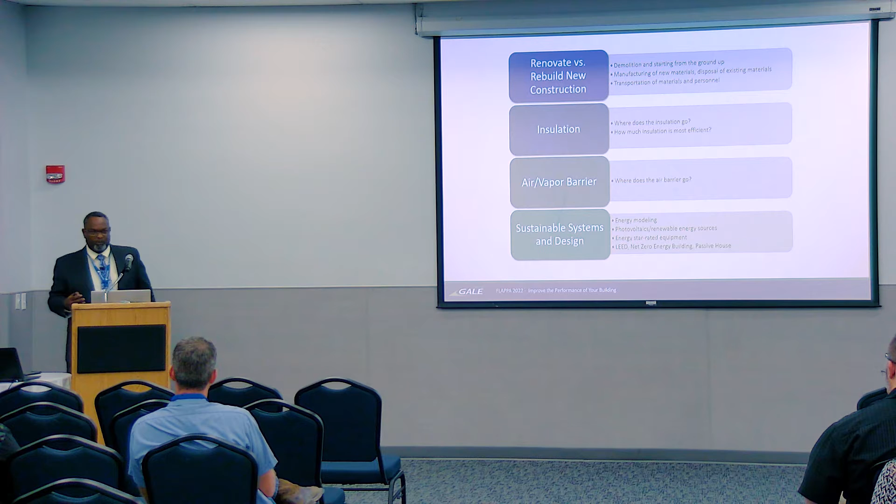So you have to ask yourself, are you going to renovate or rebuild with new construction? Whichever the case, you need the mindset of reducing energy consumption whether renovating or building new. A lot of times that wasn't considered - we just wanted to build the most beautiful building, but it wasn't performing the way it needed to perform.

One of those things everybody knows about is insulation. Insulation in your walls, roofing system, and different areas helps improve the thermal performance of your building. It reduces the need to have the AC as cold or the heat as hot as it needs to be.

Air vapor barrier is probably one of the largest things on the building envelope that can reduce your energy consumption. I did a presentation on air and vapor barrier with a slide showing 1 square inch of air coming through your wall can produce 6 quarts of moisture. That's quite a bit. So you want to keep that air vapor out of your building envelope - keep it sealed, monolithic and whole with no breaches.

Looking at sustainable systems, you can look at your building - there are firms that do energy modeling. They'll take your building, do an energy model on it, see how it's performing with the HVAC over a period of time, and show you where your most expensive times are, and the least expensive times, though you probably already know that from your power bills.

One other thing I'd like to point out is to talk to your maintenance staff - that's what they're here for. They know everything about the buildings they're maintaining. A lot of people don't really connect with them. When I go out and look at a site, I want to talk to the maintenance staff to see if occupants have been complaining it's too cold or too hot at certain times, or if they've smelled any unusual smells, the M word, mold, or something like that. People smell those things, so you tap into that knowledge as well.

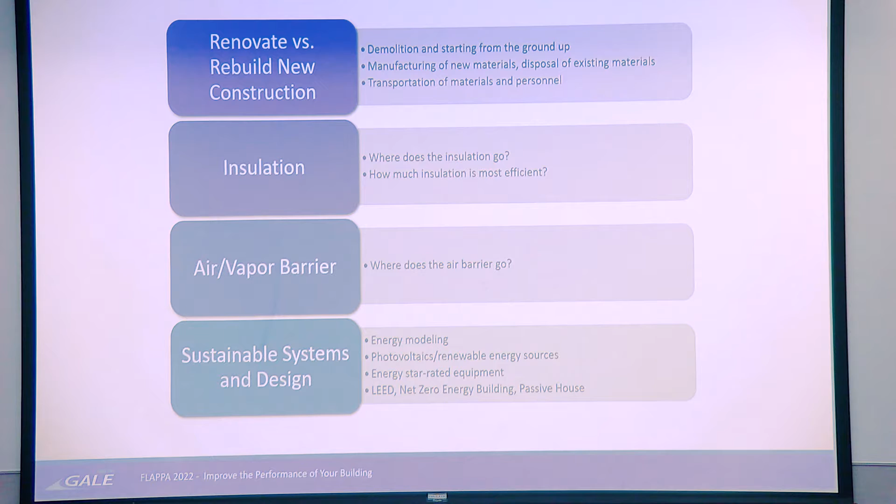They just put something in my mailbox saying we can now have your house on renewable energy only, just come and sign up. I thought, oh man, that's pretty cool. I looked at it, but the price was just as much as if I was on fossil fuels. They haven't made it economical for us yet, but it's going to be there - you're going to get that flip-flop. That's why you see all the electric cars out now.

I was really surprised that when I watched the Super Bowl this year, there were about 6 or 7 electric car commercials on. Every manufacturer is producing electric cars. When I bought my last car, gas prices weren't as high as they are now, and I wish I had a full electric, but I have a hybrid. I'm decreasing my energy consumption and emissions because I get 39 miles per gallon. So when prices went up, I had to adjust a bit, but I'm still ahead of the game.

So you'll be ahead of the game in your energy consumption when you start doing some of the things we're going to talk about. So what do you need to do first?

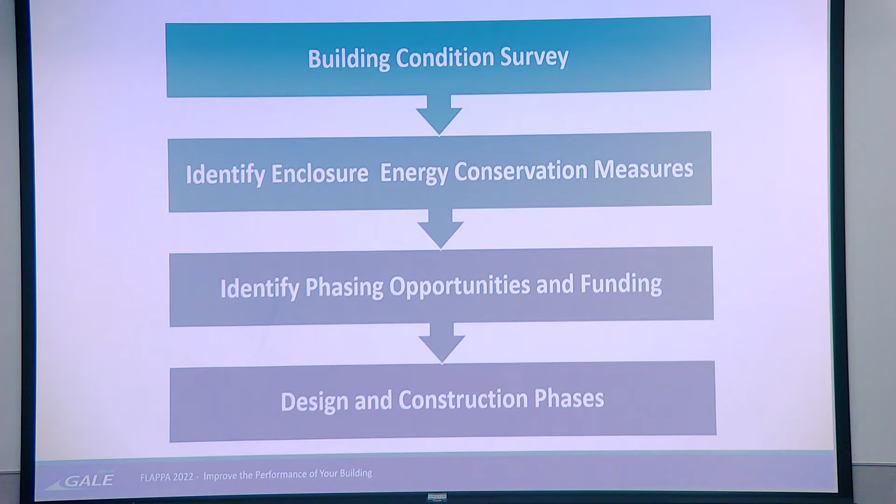First thing is we need to look at your building. Have someone look at it and find out what the issues are. That's a building condition survey. You walk around the building, your maintenance staff can help tremendously. You might see some openings, things that are not right, a ceiling joint that's off, or a window not closing properly. Even something as simple as that, you start charting that information down in your survey.

You look at your roofing system. Are you having any issues there? You identify those things, keeping that same thought process of wanting to conserve energy consumption, and you identify measures you can do. Once you've identified everything, you also look at any phasing opportunities before moving into the design and construction phase.

You have to review the existing information, which we've covered. Then field inspections, which can be visual or destructive. Most of the time you want visual, unless you see something that warrants destructive testing, opening it up to take a look at the problem. There are different types of testing out there too, like infrared analysis and hydrothermal testing.

You use all of those things at your disposal to test your envelope, and then you come up with a report and analysis of the things you need to do to improve building performance and reduce energy consumption.

Now, I've said all these things, and you might say you can't remember all this stuff and the procedures. Well, ASTM has done it for me. These are 3 ASTM standards that direct you on how to do an evaluation on your exterior envelope.

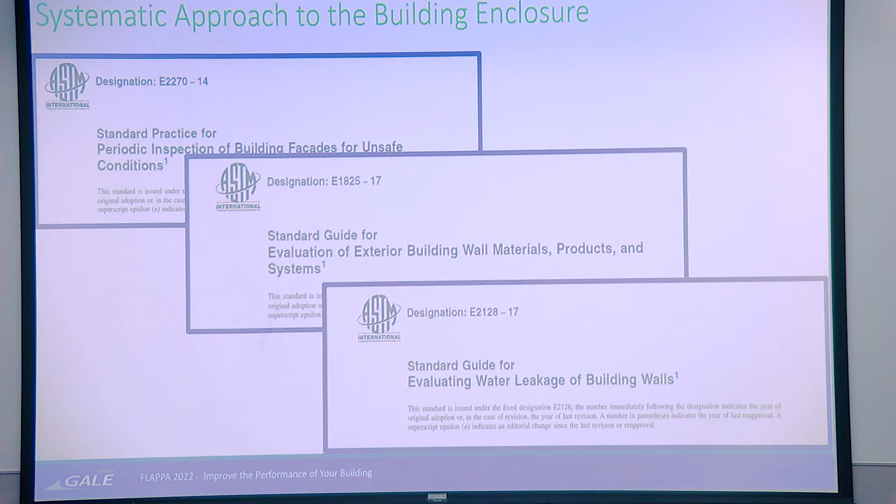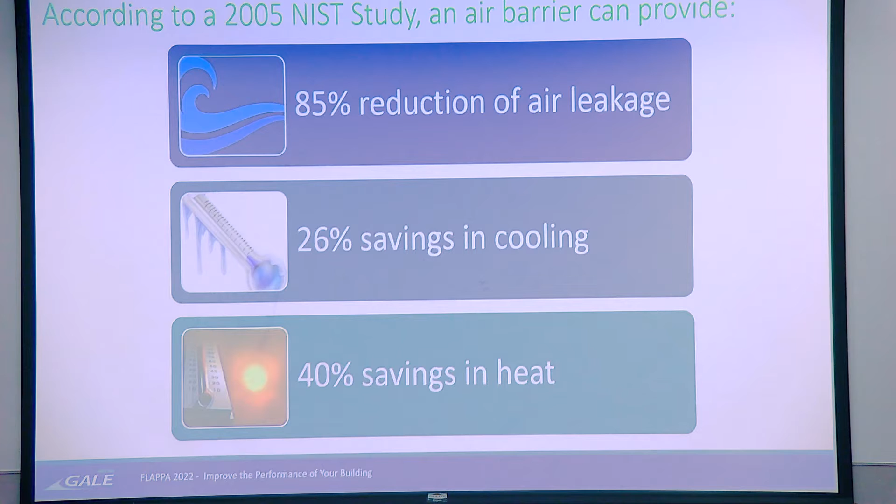According to the National Institute of Standards and Technology, in a 2005 study, they found that air barrier - the air vapor barrier I mentioned is very important - and there are many types you can use on your envelope. Utilizing one can reduce air leakage up to 85%, maybe even more. It'll reduce cooling costs, giving you 26% savings in cooling and 40% savings in heat, just by making sure your air barrier is tight and installed properly.

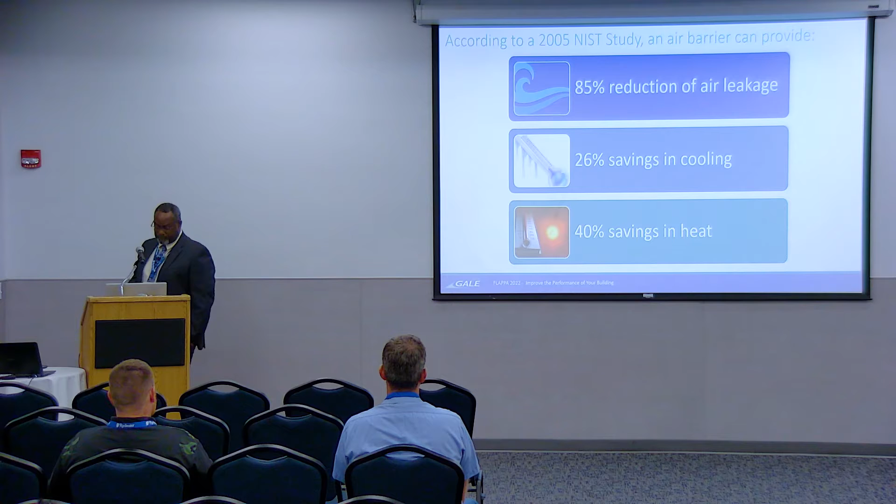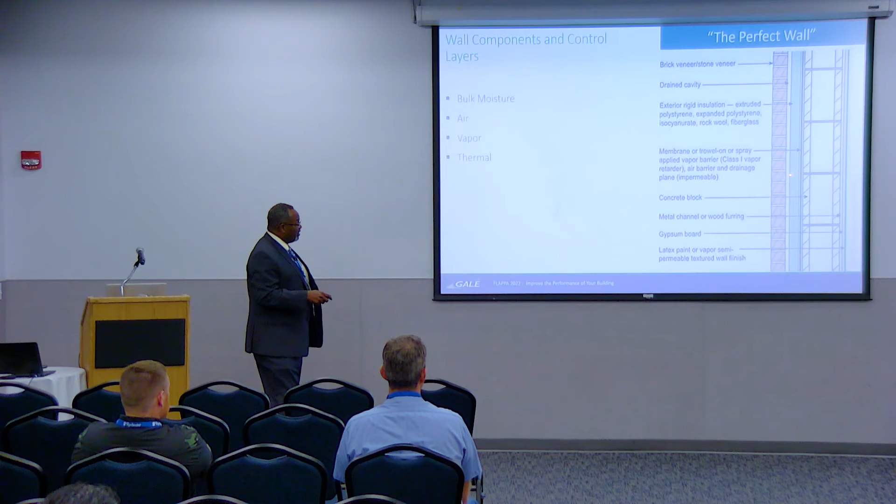Here's a typical wall component, which most of us have seen - a standard wall. You have your CMU wall, and I'm showing this because it's what we call the perfect wall. The CMU portion could be stud backing, concrete, or whatever. But what's most important after that is the air vapor barrier, then some insulation, and in this particular wall, the brick veneer, which is basically your rain screen to protect everything else. Those are the most important components in each wall system.

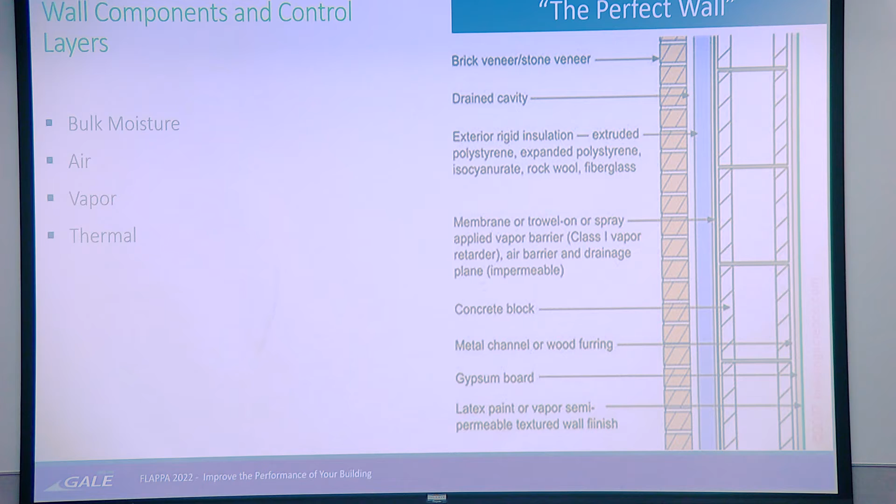If you have a breach in your insulation, you're going to get more heat coming through, obviously. If you have a breach in your air vapor barrier, moisture might get absorbed into the masonry, or if it's drywall and stud, DensDeck or something like that, it's going to get moisture in there. You're going to have delamination, problems and issues. But those are the main components of the wall.

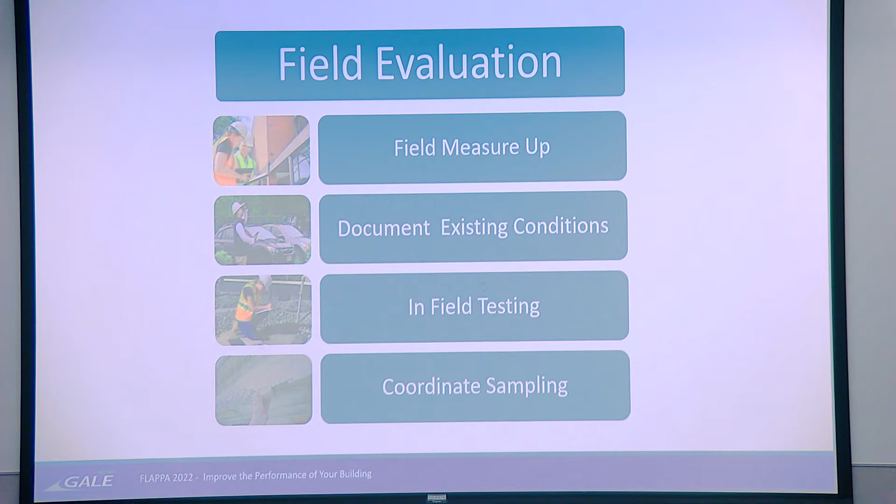So let's go back to that field evaluation, as far as what you would do to look at your building. Obviously, a field measure up. You want to document those existing conditions, do any testing, and coordinate any type of sampling.

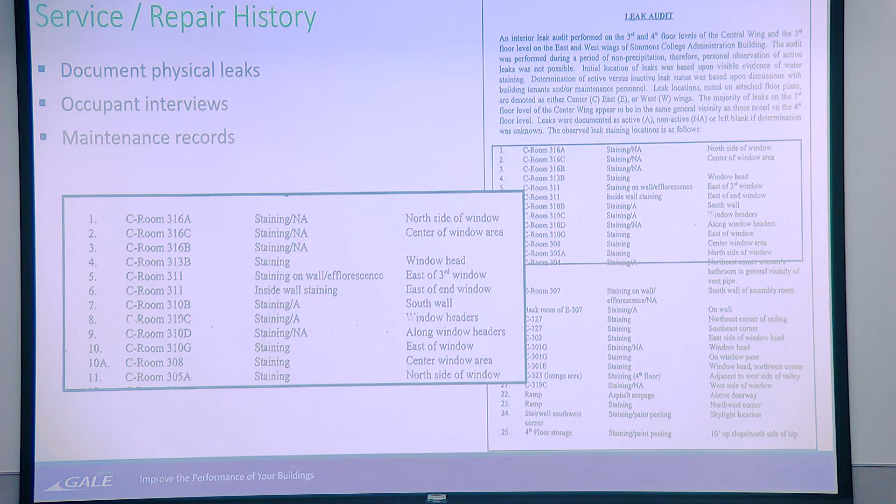Figure out the service repair history. I document that all the time. Maintenance staff is very good at having that information, so you document the service history. What that reveals to you sometimes, off the energy consumption for a second, is you start getting your maintenance records and realize we constantly have issues in room 210, or in the auditorium, or somewhere else. So something's happening that's breaching your exterior envelope, and it's costing you more money to operate that room or building. It's a red flag for you, so you can go in and investigate and try to figure out what those issues are.

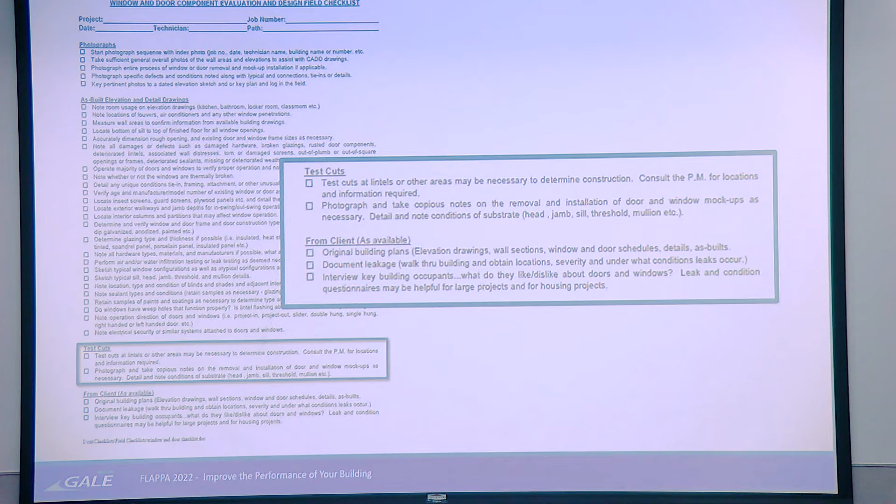This is just something I like to throw in there, a little checklist. I love checklists because no matter how young I was or how old I'm getting, I can't remember everything, so a checklist helps you remember all that stuff.

Look, even something as simple as your doors. Are they hollow core doors? Solid wood doors? Metal doors? Do they have glass in them? Is it impact resistant type glass? Is it insulated? Sometimes just go by and touch the door and see if it's hot, touch the glass and see if it's hot. And if it's pretty warm, you're bringing that heat into the space, and you're having to use more energy to cool that space.

These are all those simple things. What we do is not rocket science. Maybe 10% is technical, but most of it is just common sense type prevention.

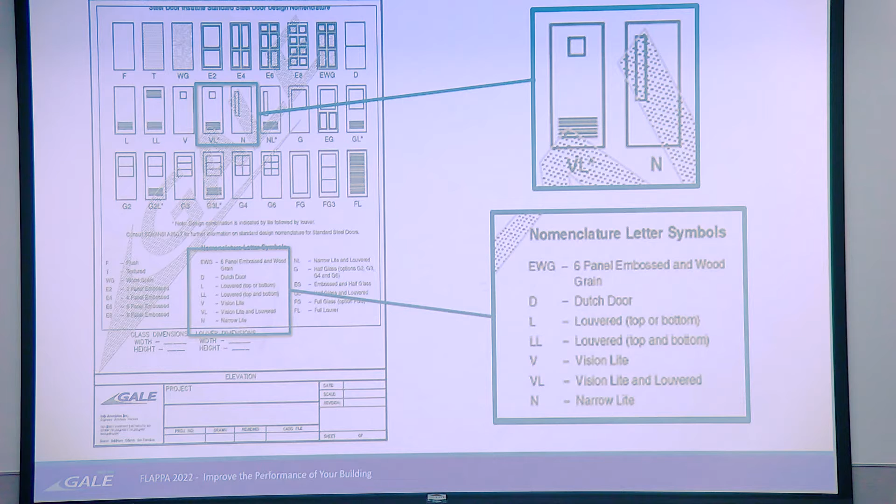One thing we don't think about a lot is gaskets on your doors. You got double doors, you got air leakage coming straight through the building. A lot of times we'll go into a facility and you can hear the wind blowing, you can hear the air from the HVAC system just blowing in or blowing out. If it's doing that, you're having to cool that and heat that.

That's a lot. When we had the first cold spell and it dropped down in the 30s, really cold for us here in the Orlando area, the wind was just blowing as strong as could be. And Mr. Envelope guy who does everything right for everybody else, I feel cold air blowing in my front door. So my wife is kind of upset because we're running the heat, and you can feel it like I had the AC on and the heat on at the same time. So I run to Home Depot, grab some weather stripping, put it around the door and seal everything up. I kid you not, she noticed right away that we didn't have to run the AC, and she started pulling the heat down a little bit more. Something that simple made a big effect on our energy consumption, saved us time and money, just from me running to Home Depot.

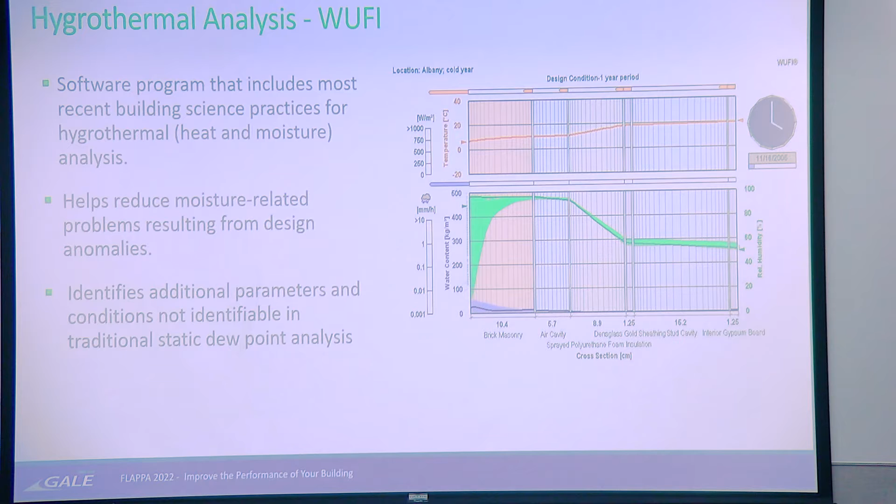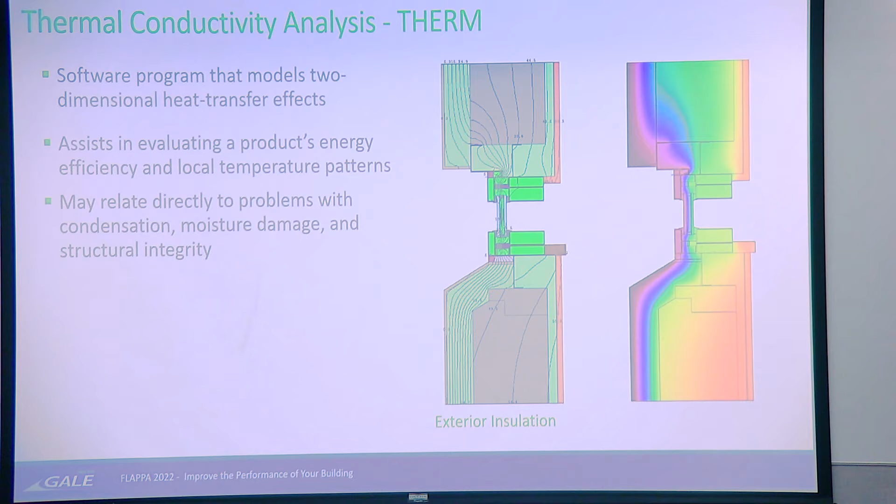One owner came and said, hey, we got all these windows put in and we got a ton of condensation. What's going on? We ran that on it, and sure enough found out they were supposed to have what we call thermally broken windows, where you have a break in the metal so it doesn't continue the conduction of heat or cool going through. They were supposed to have the thermally broken ones.

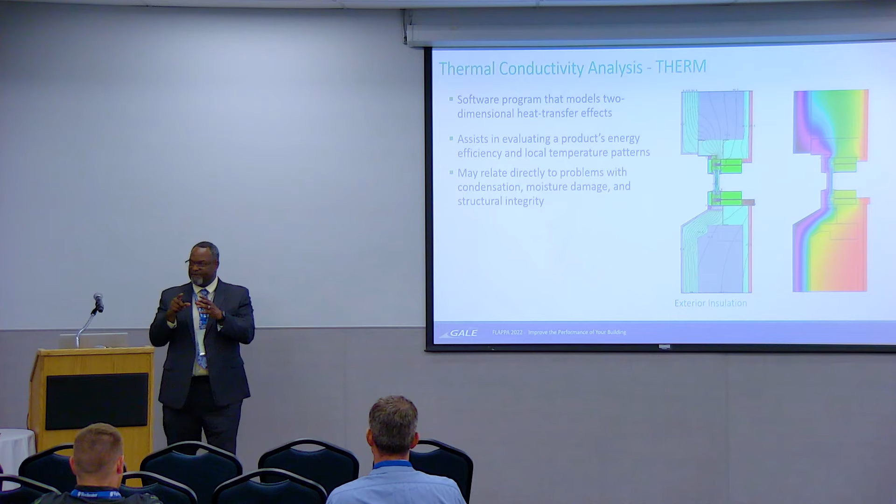We did the model, and the model showed you didn't have it. Then we went back and researched the documents, and sure enough, it was the wrong type of window. So it shows you all that stuff right up front.

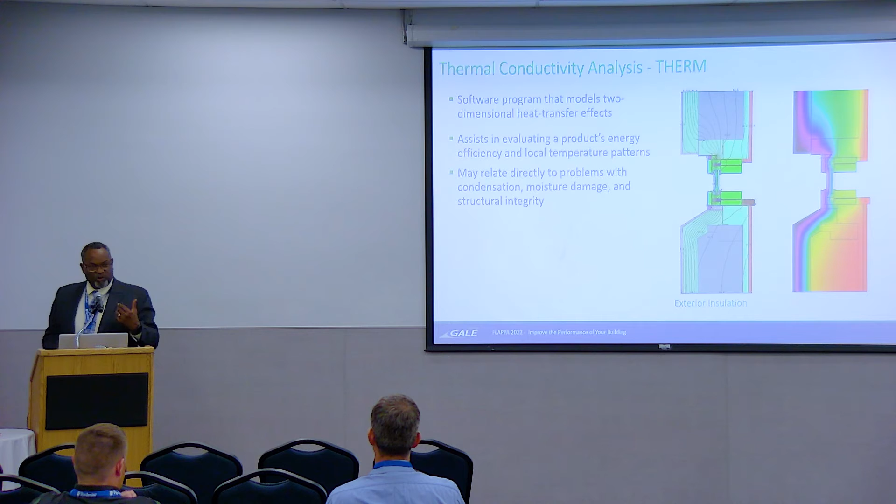Now, once you do all those things, you've looked at the building, you've done some testing, you've found out where all our breaches are, we found out what the issues are now. What do I need to do?

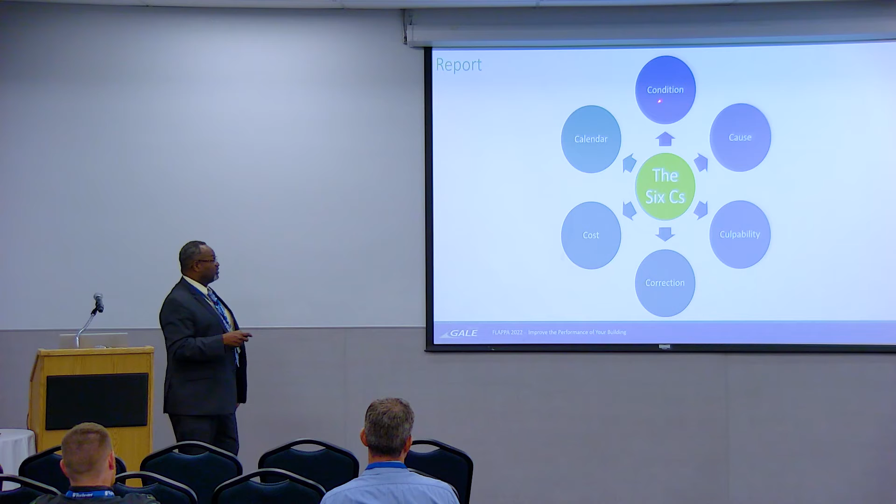Well, you got to talk to your boss or whoever it is, your upper management or personnel, and you got to give them something to substantiate what you're saying. So what he's going to want to know is, okay, what's the condition of what you found? You're going to tell him that. He'll say, well, what caused it? In your testing, you're going to find out what caused it, right? Then it's, what's the culpability of all that happening? How can we correct it?

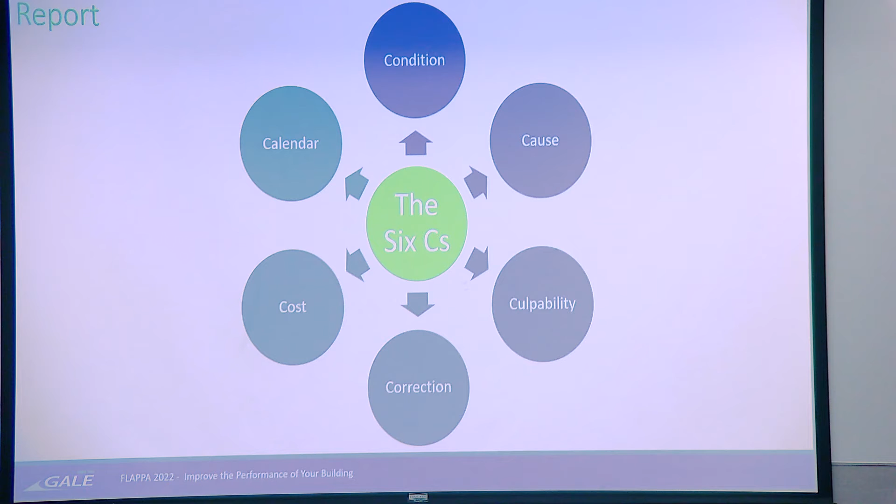And the number one thing they're going to ask you is, how much is it going to cost us? That's the biggest factor. And then the next one is, how long is it going to take us to fix it? So those are the things you want to know, and once you do that evaluation...

So what should you consider then to reduce your energy consumption? One of the biggest things is to anticipate how long your organization plans on keeping that building. Higher education, you're keeping your buildings forever, basically. They're not going anywhere for a long time. So what's the anticipated duration? Will the building be occupied during the time you have to do the fixes?

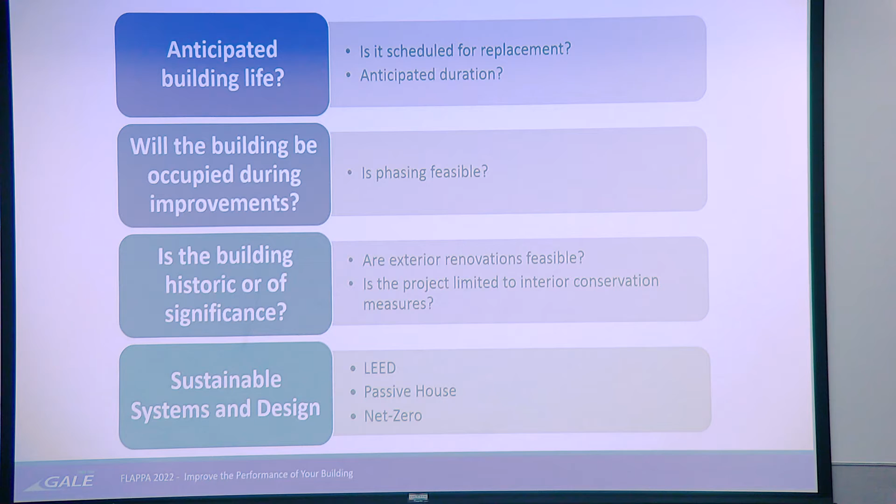Is the building historic or of significance? A lot of campuses have their historic sections, and you have to do certain things a different way as it relates to historic buildings. And then, is the building going to be based off any type of sustainability system such as LEED, net zero, or passive house? You have to look at those things as well when you're considering.

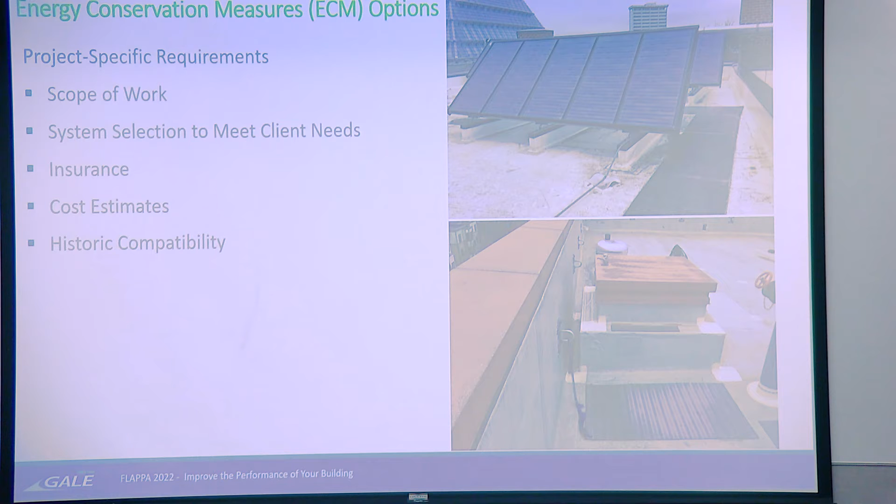So what are some of the energy measures? Some people are putting photovoltaics up just to compensate for utilizing so much energy. White roofs are used a lot, and I believe the supply chain right now for those is much better than for other types of roofing systems, like the modified bitumens and the asphalt type systems.

Last chart here is from ASHRAE, and what they've done is an energy use intensity comparison. We want to compare a certain building. Here's a building—the current facility's energy use intensity is around 207.5. They'll take your building and compare it; here's the national average, 199. So you're using a lot more.

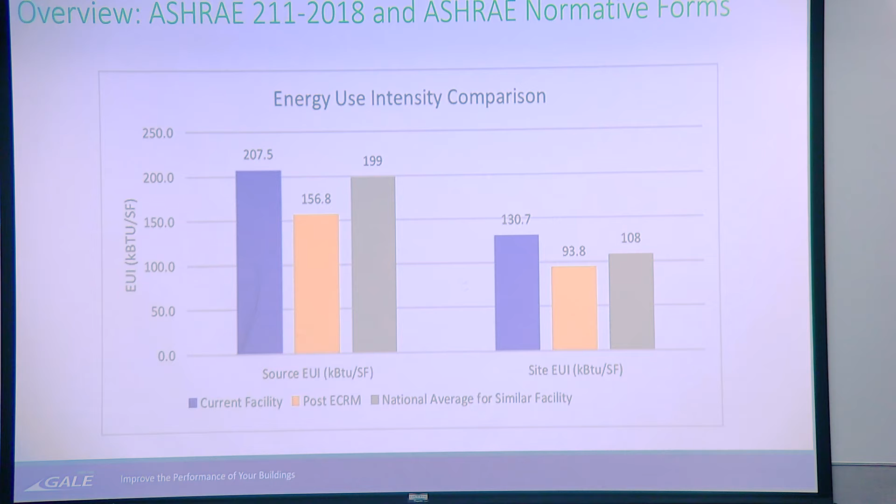You do those repairs, you do those fixes, and then you find out what are we at afterwards. This was done on a couple of facilities, and it shows you that afterwards the consumption of energy usage went down just by doing minor repairs.

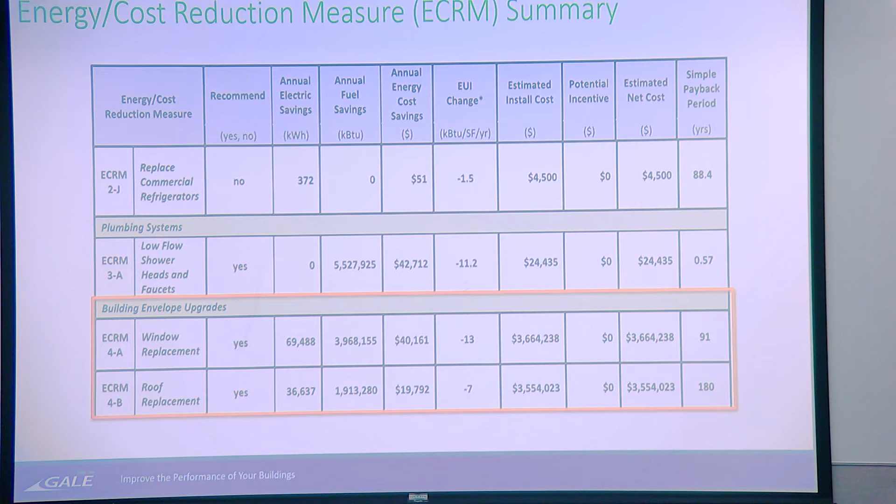When it came down to the return on investment, yeah, they dropped their EUI rating, energy usage, -13 for the windows and a -7. But look at the return on investment years. It didn't pay off. So that's why you don't just go in and make a blanket statement like, I'll just do my roof when I have major problems or leaking issues that force me to do that. Just don't go out and say, I want to replace my roof to reduce my energy consumption. It's not going to be beneficial for you.

And these are just some more examples of some of the ones that were out there. But you see it shot up in the high ranges for years of your return on investment.

Energy conservation options. When you're working on your project, whether it's going to be phased or occupied, you've got to develop a long-term facility plan to make all of these things happen, because it's not going to happen overnight. It's going to take some time to go from building to building and do what needs to be done. And the time frame to do that is going to be important. Is it immediate? Is it short term or long term that your fix needs to happen?

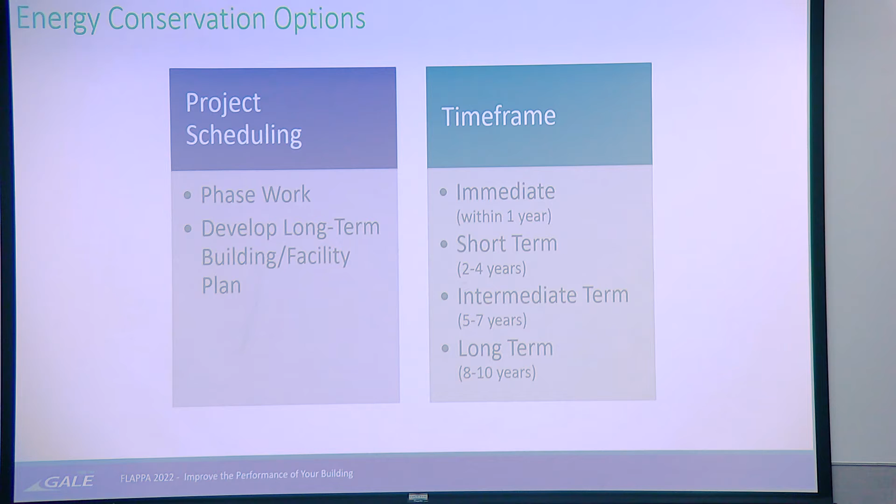Obviously, if you just got windows that are leaking like a sieve, that's immediate. You need to do something to address that.

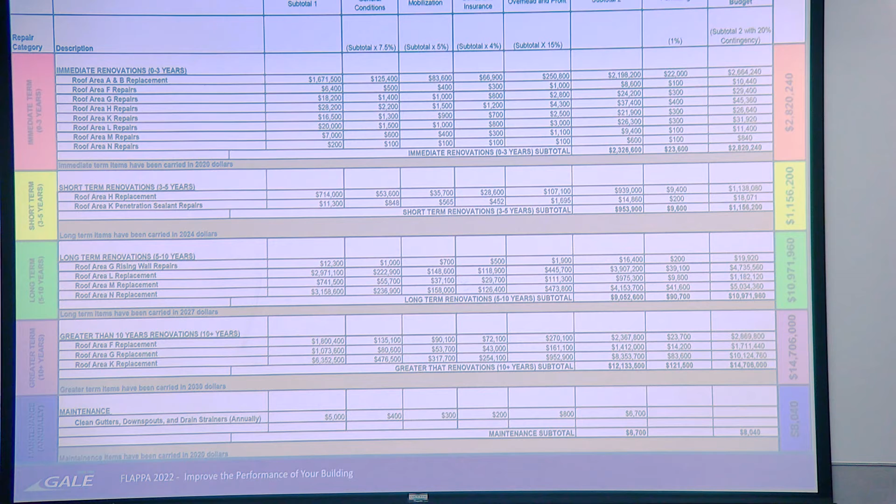This particular chart just kind of shows the same thing I just told you here shortly - short term, immediate, long term, etc. And these are just for roofs basically, just giving you an idea of when you do some repairs, and when do you have to replace it. It's going to be short term, and those are programs out there to help you do that.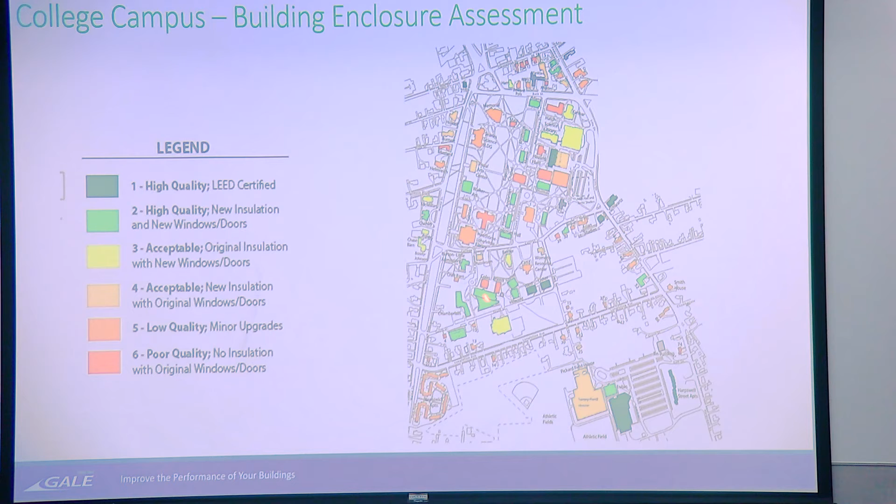I wanted to show this one because a picture's worth 1,000 words. Once you've had an analysis done on the different buildings and found out if you have any issues related to air, moisture, and vapor getting inside your buildings, you do a little color chart. This is a campus where you did a color chart. Red is poor quality, green is high quality, so your superiors can see right away: we can address these on a phased approach. You put them on a scale of worst case scenario versus not so bad, but at least it gives you an idea of how that's mapped out, what needs to be replaced.

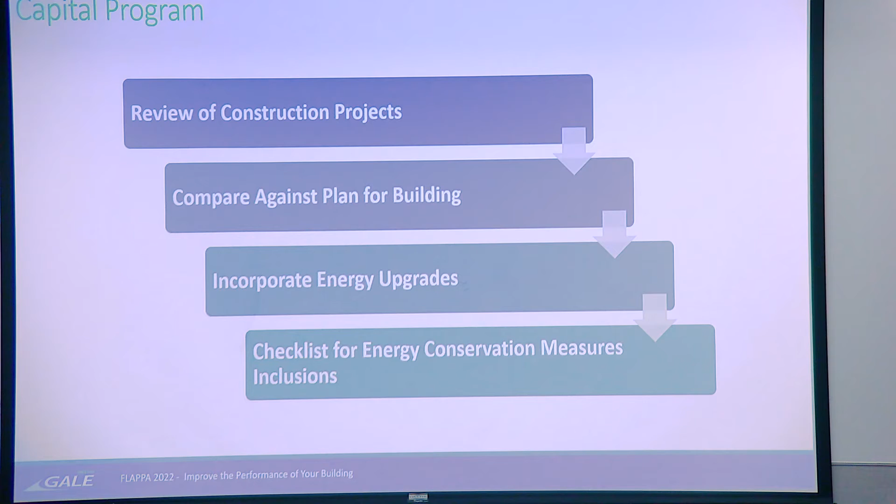So we can review the construction projects. If you're doing a capital program, you review those projects and say, hey, we want to include these repairs in our capital improvement plan. Whether it's immediate or long term, you can fit those issues in there a lot easier now that you know what they are. You're not shooting and throwing darts at the wall - you figured out what you need to do, and you can plan for it. You compare it against the plan for a new building, or you can incorporate some energy upgrades, such as insulation, vapor barrier, resealing around your windows, resealing around the doors.

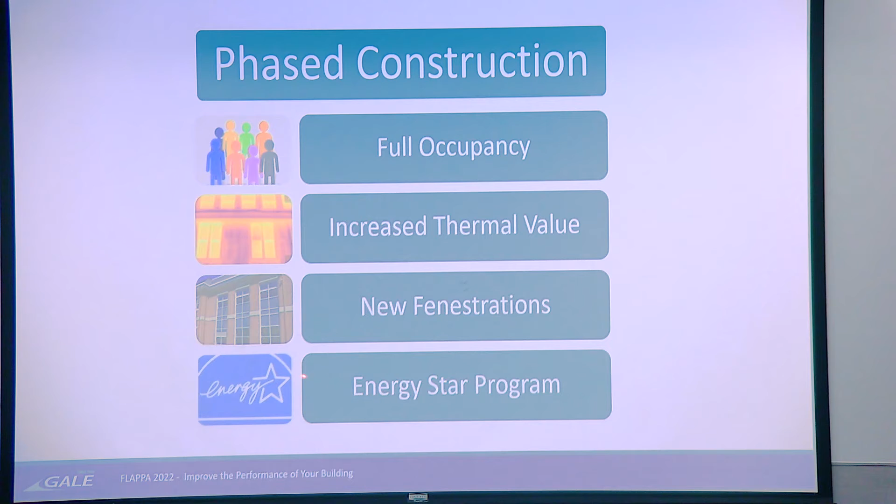Now let's look at a quick little case study here. This particular building was phased construction. It was at full occupancy at the time. The thermal value was increased, new windows were installed, and it was on the Energy Star program.

Now, what the Energy Star program is, they give you a rating of 1 to 100. Say, for instance, your building's at a 60, right? They've rated you and you're in that program. Well, you say, okay, I want my rating to be a little higher, so I'm going to go do some things to reduce my energy consumption. So you go in, put a few new windows in, or seal up your envelope, your exterior, and you're not using as much energy.

And you jumped up to a 75, and you think, great, my rating's a 75 now. Well, they compare that to other buildings very similar to yours. So school A, owner A, is at 75 with this type of building. Owner B just went and did some improvements, now he's up to 80, 84, so it pushed you back down. You think, wow, my same building is not meeting it now. The reason they do that is to make the owners keep competing against each other to make sure their buildings are efficient. You want to try to get to 100 as best you can.

In this particular scenario, the building was fully occupied, and it had new improved windows, and thermal values were changed because of the insulation on the walls. I told you it was part of the Energy Star program. As your building ages, and new buildings get constructed, your rating goes down.

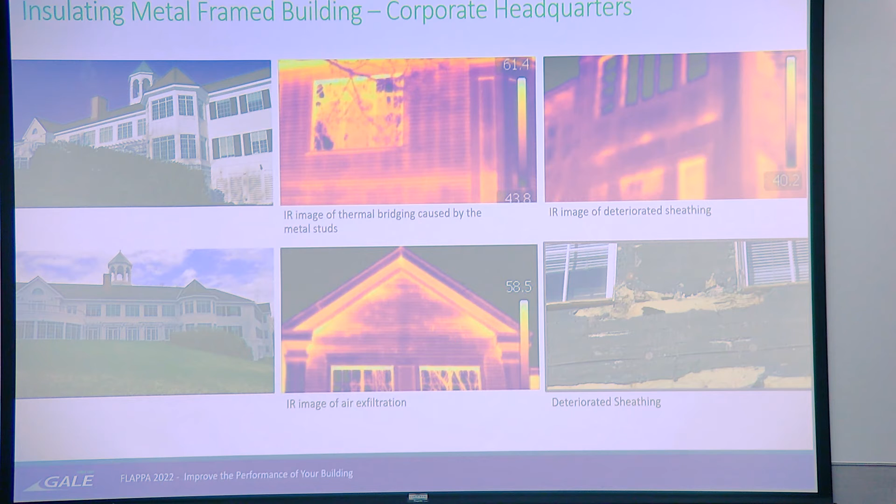And you can see here that around the cornice in the attic, a lot of heat is going on. Something's going on there. So the infrared tells you have a problem.

With destructive testing that was going on, once that cornice was cut open, you could actually look down the wall and see inside the building. It was losing all of that heat, going back and forth from the attic to the interior of the building. It was all open, and it was getting to the windows, and that's what occurred when they took some of the siding off. It was all damaged because the moisture and the heat and the vapor was getting into the building, and it ruined the wall exterior, the wall stuff below the cladding. So all of that pointed out just from looking at infrared alone.

So there was obviously no need to do any leak testing when you saw that. Now, what were some of the things the owner decided to do? He said, okay, my building is actually sick and I'm using so much energy because of all these openings.

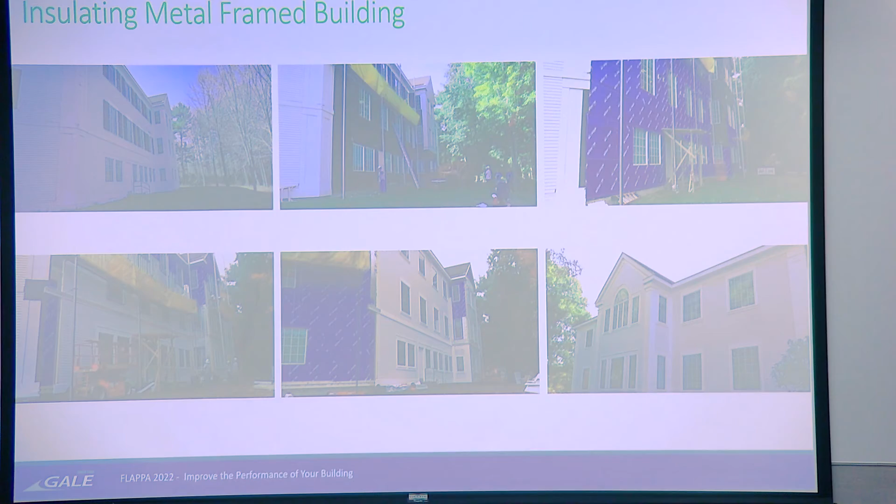They actually went through, took the cladding off, put on a new vapor barrier around the wall system, put on new substrate as well, new vapor barrier, insulation where it was needed, where it was damaged, and just replaced whatever was damaged, put new insulation there. And what was so unique about this one, since it was occupied, is what happened was...

The contractor came in and said, okay, I know I have to take out these windows, but this building is occupied. He would come in early in the morning, take out about 2 or 3 windows in a certain area, put the wood framing for the new windows to go in, waterproof it, put the vapor and waterproofing membrane in there, and then put the windows back in. By 10 a.m., the workers, the building occupants, could come in and go back to work in their office. That's a part of phasing and staging.

In the end, they ended up putting the rescanning on that, and it saved - their bill went down tremendously as it relates to their energy consumption. So you're able to use those dollars other places now instead of just on maintenance repairs.

On that insulation I was telling you about, it was supposed to be an R13. Because of the metal studs, it broke up the flow of the insulation, creating a thermal bridge. Because the insulation wasn't continuous, it reduced the R value to a 6, when it's supposed to be a 13.

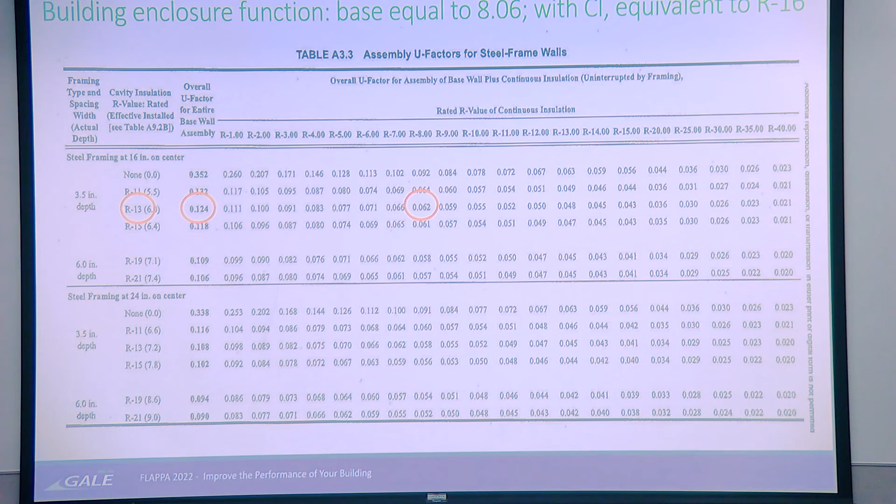So over half, it reduced the R value of the wall system, which means what? If your R value isn't there, it shows you how your wall's performing thermally. The higher the R value, the better. So the R value got cut in half because of the metal studs.

So in the repair, what they did was keep the insulation within there, put a 2-inch continuous layer over the studs, and then put the drywall on. Then it jumped back up to where we're supposed to be according to code. They're not using much energy anymore. Something as simple as that.

That was obviously a worst case scenario. Everybody's not going to reclad their entire buildings all the time. But we just wanted to show you how impactful making these types of changes can be.

So here's another one. This was a full renovation, not occupied. There are some times where campuses say, hey, we're going to use this building for something else, nobody's in it, so let's renovate it. Then you put your mindset on and say, if we're going to do that, let's make sure the building envelope improves the performance of this building while we're doing it. That's the case of this particular project.

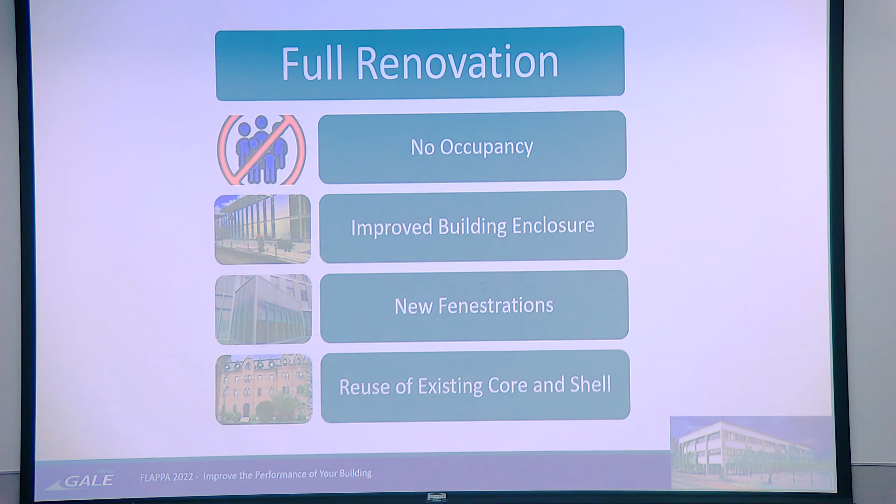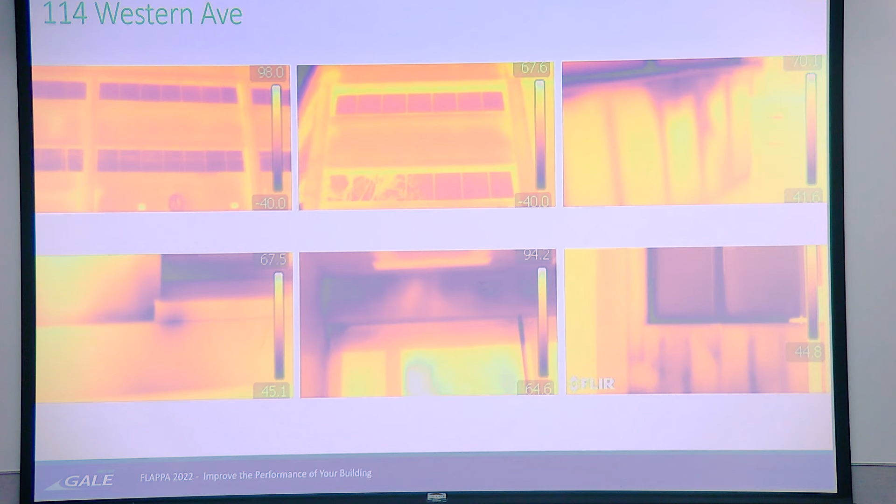So they came in with infrared imaging again and found problems around the headers of the windows, wall leaking in between them, and you can see the studs. The studs are cool in this one, but between them there's no insulation, which is why it's showing a hot signature.

So they came in and said, what can we do? This was unique because this is a concrete structure, so they asked what could be done. They just put some insulation on the back sides of the concrete panels. Everybody's familiar with spray foam, and they actually put spray foam on the back walls of the concrete walls.

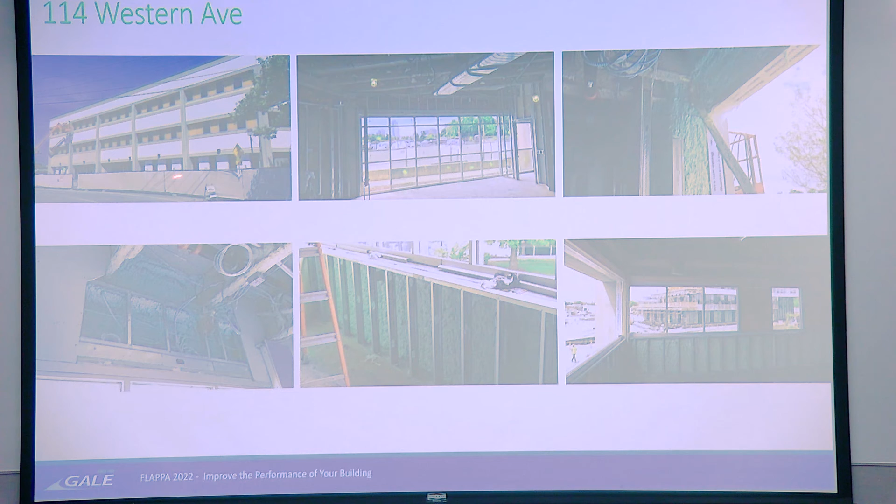There was an area here that had a little concrete knee wall. They weren't using a lot of these areas, like the balcony and outside areas, so the owner said he wanted to increase his square footage. So they took those out, pushed the wall out, and put in thermally efficient curtain wall, which expanded the square footage of the space and gave some more daylighting.

Last one, exterior recladding. This was full occupancy as well, and some of you have dormitories that look very similar to this. This was an apartment complex very similar to that. And this again is a worst case scenario.

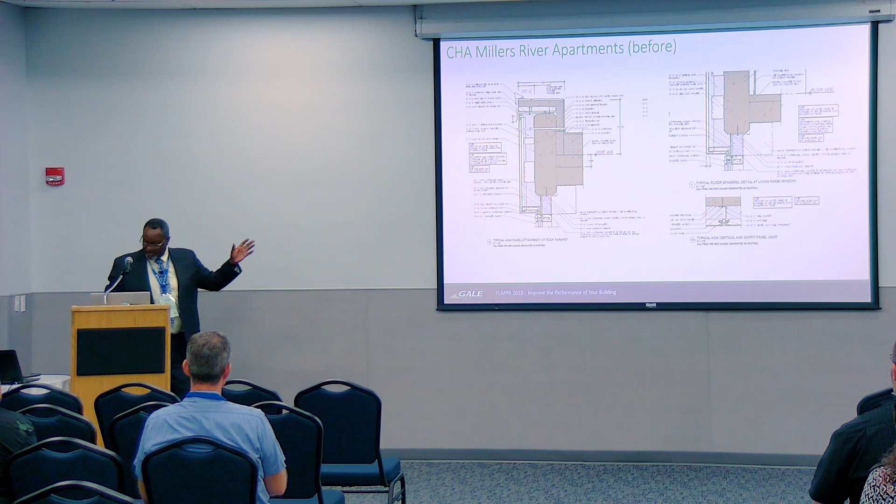And that's just a close-up of how they were tying in all of the different components to make sure that nothing was getting through. You can also see the rock wool insulation they put on those areas that didn't have any windows.

This owner was very serious about not wanting to spend a lot of money on electricity and energy. And it came out, and that was the end result, and turned out to be a great project for the owner as well on his savings.

There's a lot we could go into on this in super detail, so I tried to keep it as simple as possible. I was always told when I speak, keep it simple, stupid. But I'll open it up for any questions you might have.

Do any of you get an opportunity to find out what you're spending in certain buildings, what your energy costs are? That's something you should ask your superiors: what is our average cost for maintaining this building on our energy? Then you might say, we're going to be doing some repairs over here, and in a month or two, once we've done the repairs, can you tell me what we're spending on this. Just do your own little test case and see if it reduces anything.